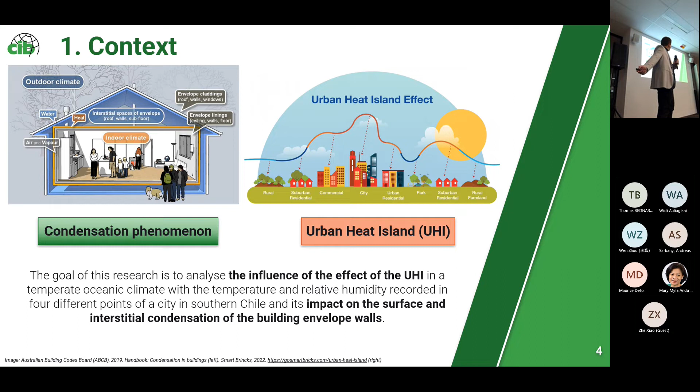About the research methodology, in Chile we have 2 different regulations about this topic: the NTM 11 about the requirement and accreditation for the environmental conditioning of buildings, and the Norma Chilena NCH 1973 about the hydrothermal behavior of building elements and components, interior surface temperature.

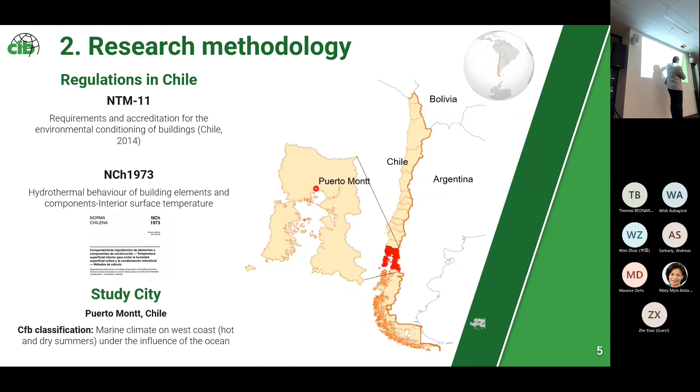You can see here in the map that Puerto Montt is very near the sea.

This is the city of Puerto Montt. We installed 4 different sensor data loggers in 4 different points of the city, and another sensor in a rural area, very near the airport. The sensors are Netatmo. They record data every half hour of temperature and relative humidity inside and outside the houses.

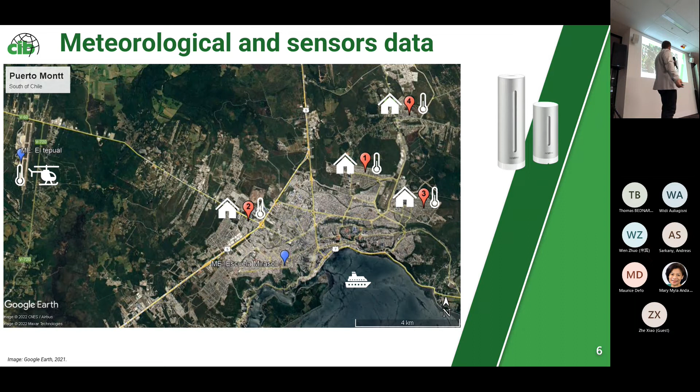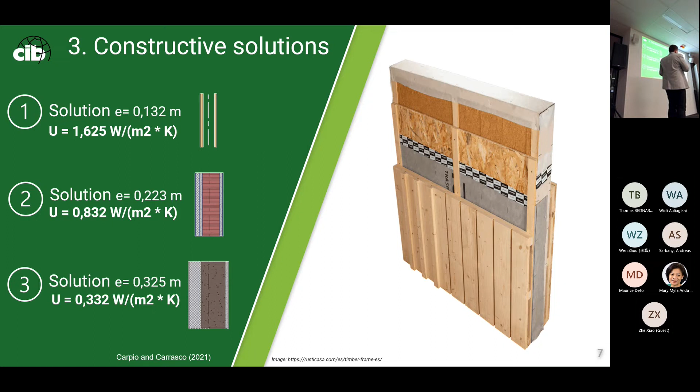Constructive solution: we simulate and calculate with 3 different constructive solutions. Solution 1 with a U-value of 1.6, solution 2 with a U-value of 0.8, and solution 3 with a U-value of 0.3. Here you can see in the picture the different solutions, and in the full paper you can see all the characteristics of the material. These are the 3 most typical solutions for the city.

About results, we have 4 different steps: temperature and relative humidity data, temperature profiles, water vapor pressure profile in the envelope, and condensation time.

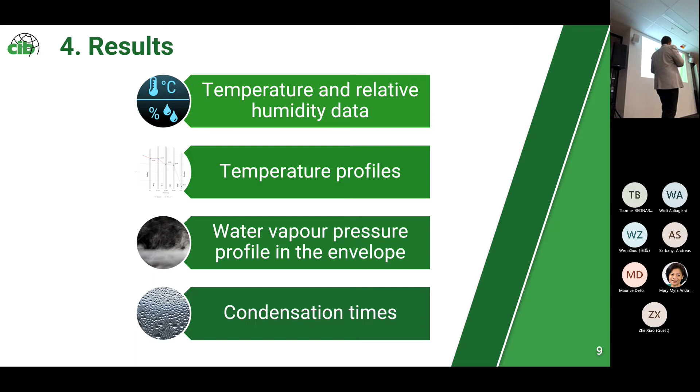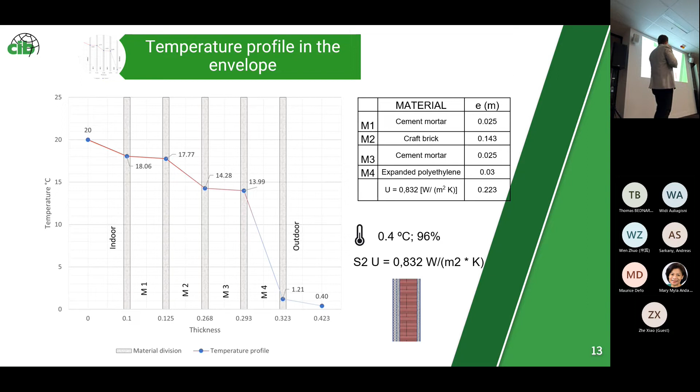Temperature profile in the envelope: we did the temperature profile for the 3 solutions for the 4 points every half hour in 1 month. We have a lot of information, but this is only one example for solution 2 with a U-value of 0.8. We can see that for the simulation, the internal temperature is always 20 Celsius degrees. We can see the profile of temperature through the different materials — for the construction we have cement, brick, cement, and insulation. This graph is for the day with lower temperature, only 0.4 Celsius degrees, and 96% relative humidity.

About the water vapor pressure profile in the envelope, this is an example of the same case, and we compare the saturation pressure with the partial pressure of vapor. In this case, we can see that we have condensation in the envelope.

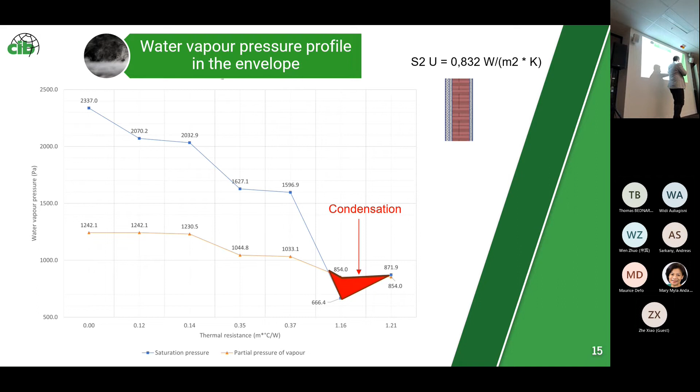We studied the 3 solutions in 4 points over 1 month, and for August, which has 744 hours, the worst case is with solution 1, where 40% of the time the construction has condensation, and the best case is solution 3, with only 0.8%. I think that this is good, but the best case is 0% condensation. Now we are working with the ministry to produce recommendations for the envelope so that in the coolest month there is 0% condensation.

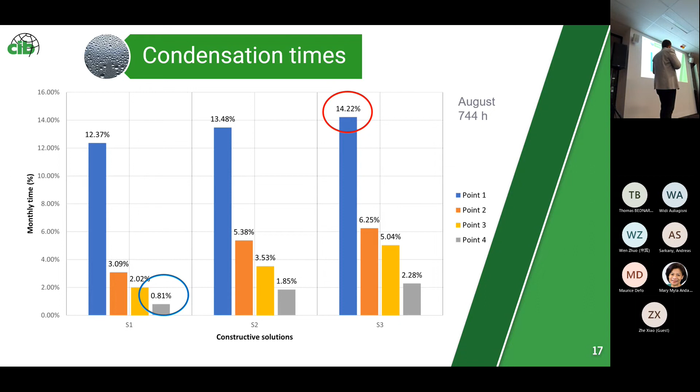Conclusions: the urban heat island effect causes an alteration of the microclimate in different parts of the city during certain days of the coolest month. On some occasions, it increases the temperature and relative humidity above the maximum recorded by the meteorological station, which increases the potential for condensation. This risk is present in the same way for the study city. For future research, it is proposed to design constructive solutions adapted to the urban microclimate that comply with local and international standards to deal with the influence of the urban heat island effect, in order to reduce the risk of condensation in the building envelope.

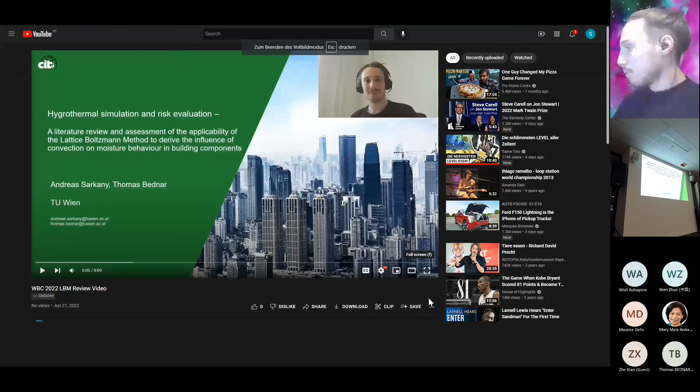So this means he's muted himself. This is the video, yes.

Hello, my name is Sarkany and I work at TU Wien... [introducing the] literature review and assessment of the applicability of the Lattice Boltzmann method to derive the influence of convection on moisture behavior.

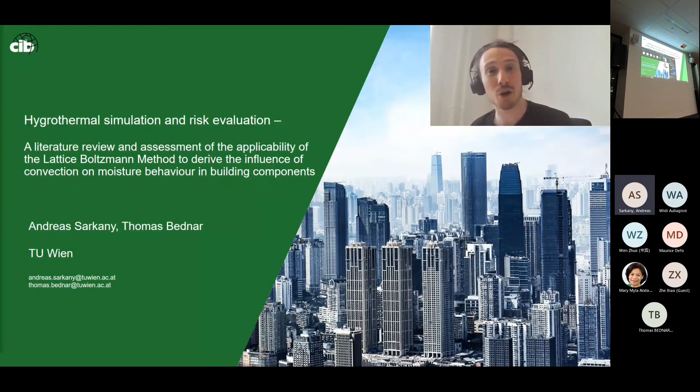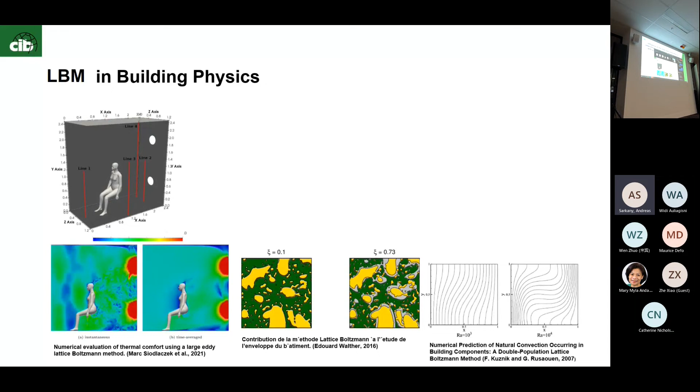In the last two decades, the Lattice Boltzmann method has proved to be a helpful tool for studying the behavior of flows in the mesoscopic domain in a variety of fields, covering a wide range from medicine, geology, to material technologies. Although the method gained popularity in the aforementioned fields, applications in building physics have been limited. It was used to evaluate thermal comfort, and some general testing and exploration to determine possible fields of application has been done. For example, it could be used to deduce describing parameters like viscosity of a porous medium, or to calculate natural convection in building components.

So first of all, one has to ask, why hasn't there been more involvement in exploring this method? One driving factor seems to be the simulation domain or scale the Lattice Boltzmann method usually operates on. Most problems in building physics take place on a macro scale level. Our usual tools to answer questions on this domain are hygrothermal simulations when evaluating building components, and CFD or network simulators when assessing thermal comfort and other questions at the whole building level. While some fields of physics and chemistry concern themselves with operations on the microscale level, like molecular dynamics, the Lattice Boltzmann method usually describes problems in between these, on the mesoscale domain.

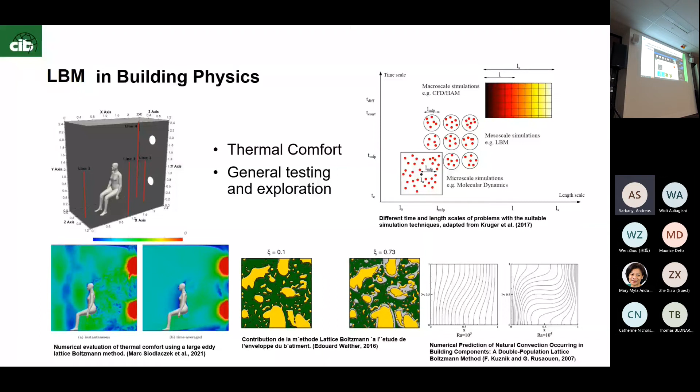The discrepancy of problem scale leads to the unavoidable task of finding problems in building physics to apply this method to. While for thermal comfort the Lattice Boltzmann method can be used to replace CFD simulations, and due to its highly parallelizable nature, speed up those simulations in certain situations—especially for hygrothermal simulations and moisture safety—the applicability of the LBM is not of trivial nature. Therefore, in this review and assessment of applicability, we wanted to shed light on whether there is potential for the LBM to better characterize certain phenomena.

Due to the favored simulation scale of the Lattice Boltzmann method, problems occurring in gaps and joints, like convective moisture transport due to natural convection, seemed like a good fit for a problem domain to apply this method to. An example could be the air gaps between EPS board joints and EPS and purlin, depicted in this model of a ventilated attic by Lewis et al. Here, potential airflow, either naturally occurring or forced, could lead to unwanted moisture transport between these layers.

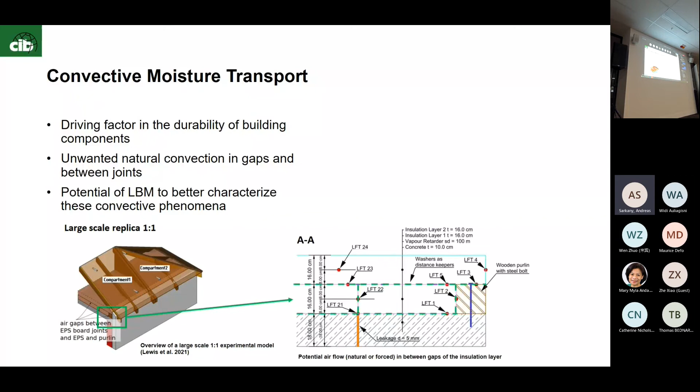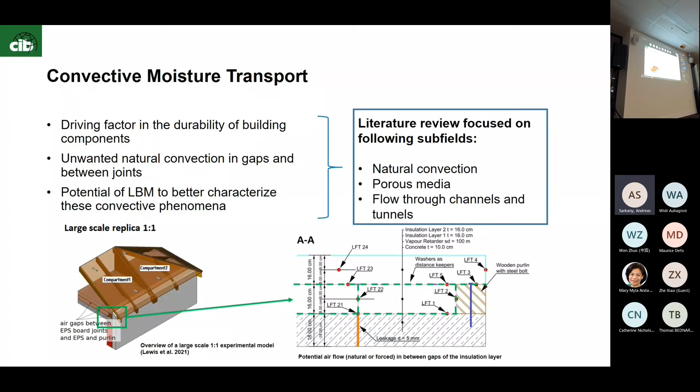After determining the problem domain we were posing our question on, we narrowed the literature review to subfields with subtopics relevant to our question of how to couple analysis between a mesoscopic and macroscopic scale. The subtopics include natural convection, porous media, and flow through channels and tunnels. When looking at natural convection, the topics of square cavities, porous media, and coupling of analysis were chosen as potent subtopics regarding the research question.

The square cavity can be regarded as a general recurring fitness check for the LBM. The usual model configuration presented is a 2- or sometimes 3-dimensional square cavity, which is differentially heated to induce natural convection of the medium inside. More complex domains involve adding obstacles inside the cavity, which can be heated or not.

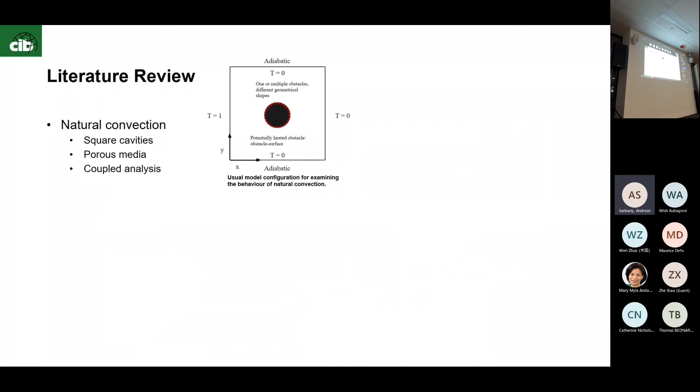Studying porous media, either the flow through or around the media and the influence of the porous matrix on its behavior is analyzed. Coupled simulations using the finite volume or finite difference methods with the LBM to simulate natural convection could also be found. These hybrid Lattice Boltzmann methods showed speedups in computational performance and lowering of mesh resolutions, depending on the coupling techniques.

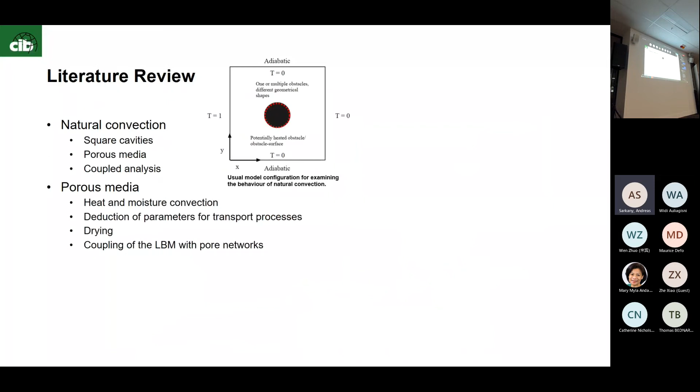Porous media was chosen as a review topic since most of the materials we are dealing with when analyzing the moisture safety of building components are of porous nature. Especially the deduction of parameters for transport processes show promising coupling possibilities.

Sousa and Nabovati showed in 2008 that they could deduce the permeability of a porous media model via an LBM simulation. For this, they randomly generated the pore structure, ran an LBM simulation, and based on the results for the speed of the fluid traversing through the medium, were able to recalculate the permeability needed for the Darcy equation to recreate this behavior.

If you remember the previously mentioned example of gaps between EPS boards and joints, one cannot ignore the wide range of work done when analyzing the flow through channels. The vast variety of these works are well suited for validation of self-created models and optimal calibration of the Lattice Boltzmann method for different boundary conditions.

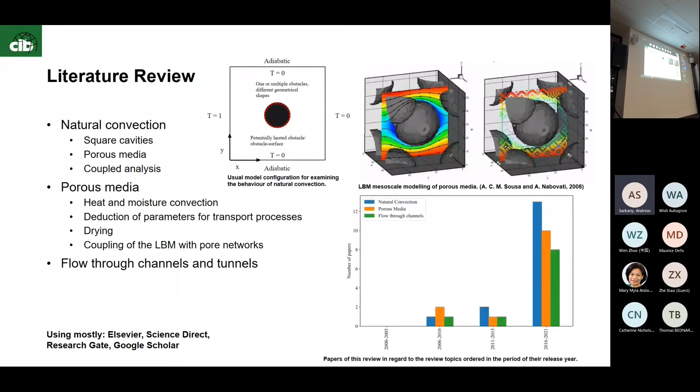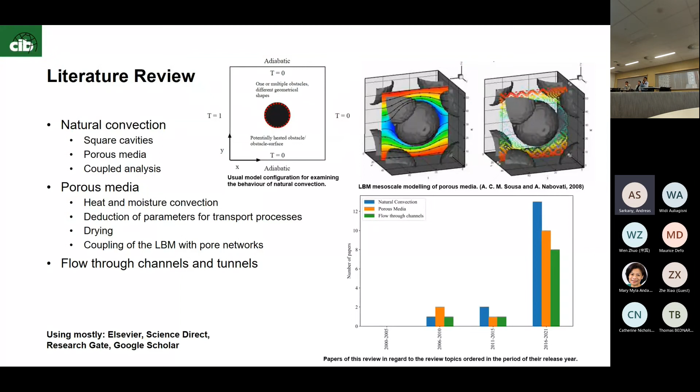In the paper, there is also an outline of the different LBM schemes used for the different topics, where this information was available. We also looked at the distribution of papers in regard to our research topics over the last two decades. We can see the general increase of work done in the reviewed areas in recent years, but this does not necessarily correlate with the research question itself; it may also be due to the rising popularity of the Lattice Boltzmann method in the research community.

Although we narrowed down our research question to the coupling of the Lattice Boltzmann method with hygrothermal simulations, especially for unwanted moisture transport by convection, a general goal of this review is to provide a good starting and reference point that can be used by researchers interested in applying the Lattice Boltzmann method in the realm of building physics.

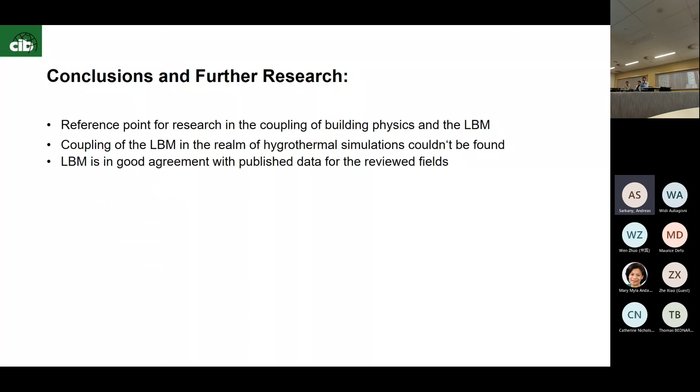Concluding, we can say that we couldn't find any works where the LBM was used in connection to hygrothermal simulations. In general, the reviewed works show that the LBM is in good agreement with published data from the reviewed fields, solidifying our hypothesis of the fitness of the Lattice Boltzmann method to be used as a tool in our further research. So what is next for us based on the conclusions we could draw from our review and assessment?

For now, the deduction of convection-relevant parameters shows the most potent possibility, in our opinion, to couple the LBM with HAM simulations. As a next step, we will focus on determining a subset of the usable parameters of the macro scale. The goal is to show the applicability of the coupling between the Lattice Boltzmann method and hygrothermal simulations in a numerical model.

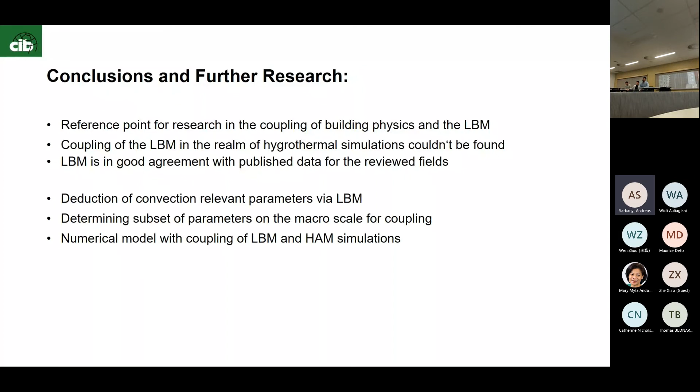This should conclude our short overview. I hope I could spark your interest in the Lattice Boltzmann method and its possibilities in the realm of hygrothermal simulations. For now, I'm looking forward to the following presentations and wish you all a nice conference day here at WBC 2022.

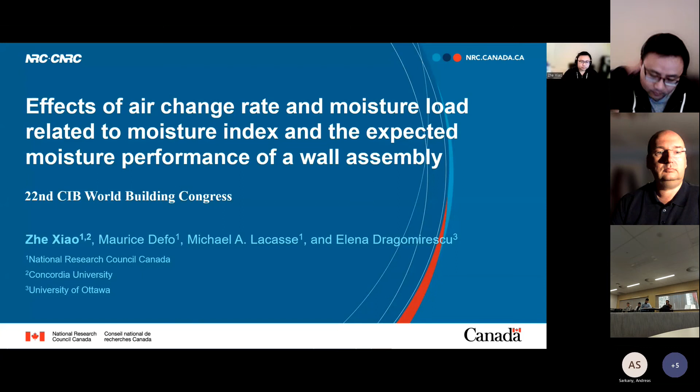Can you hear it? Yes. I'm also a visiting worker working for the National Research Council of Canada. The study I'm going to present today is about the effects of air change rate and moisture load related to moisture index and the expected moisture performance of a wall assembly. The moisture index was developed by the National Research Council of Canada, and it was used to describe the extent of moisture load imposed on wall assemblies located in different regions across Canada.

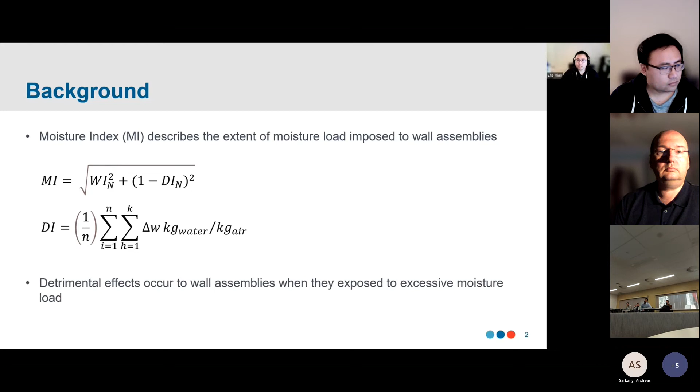This index, incorporated together with the number of heating degree days for a particular location, was used as an indicator to determine the minimum level of moisture protection for exterior walls. When the moisture index is greater than 1, the cladding assembly requires a second plane of protection incorporating a capillary break and sheathing membrane, building elements that can be presented in various forms given the different types of wood frame wall assemblies constructed in practice. Detrimental effects could occur to wood components of walls when exposed to excessive moisture load for a prolonged period of time, with typical effects including mold growth and wood decay. For locations with a higher moisture index, the wall has a greater chance of exposure to excessive moisture load.

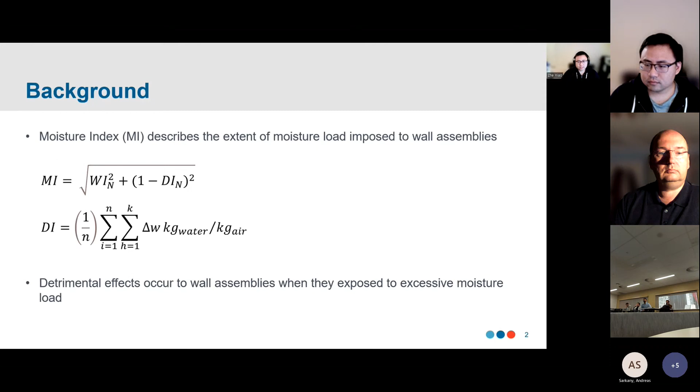The objective of this study is to figure out to what extent the moisture index can reflect the performance of walls under different conditions, particularly the ACH and the moisture load.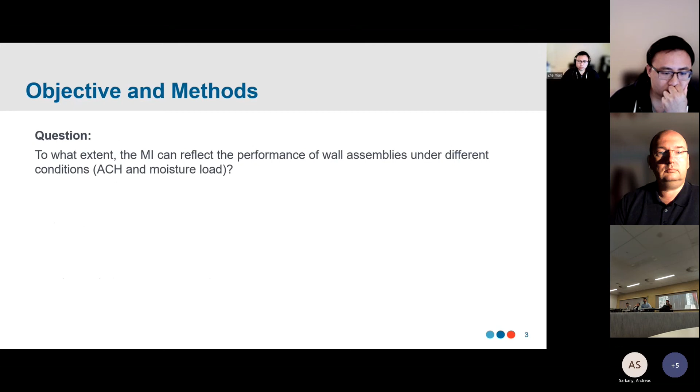Specifically, the procedure includes performing hydrothermal simulations for vinyl-clad walls located in different Canadian cities with different moisture indices, subjected to different levels of ACH and moisture load. In the second step, we'll derive the mold growth index for wall assemblies subjected to the climate of these cities, and then investigate the correlation between the mold growth index and corresponding moisture index.

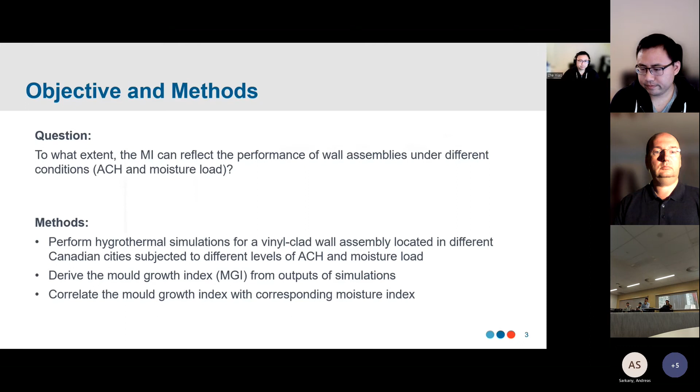The simulated wall consists of a layer of vinyl cladding and asphalt-impregnated paper-based membrane, an 11 millimeter thick OSB sheathing panel, 140 millimeter insulation, a vapor barrier, and gypsum board. The depth of the air cavity was set as 2 millimeters to represent the space beneath the vinyl, which varied from 0 to 5 millimeters for an actual constructed vinyl wall.

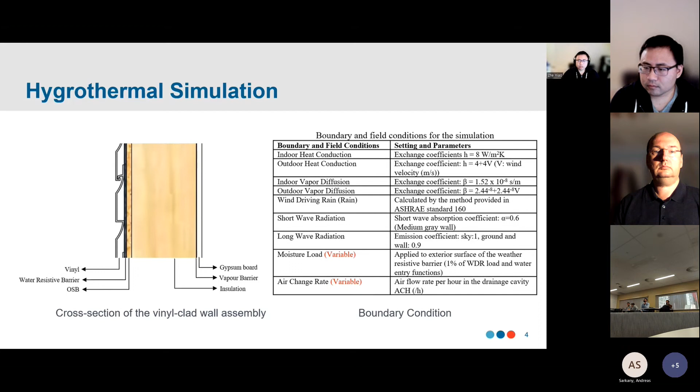Properties of materials of the wall assembly were obtained from the NRC material property database. Boundary and field conditions for the simulation are shown in this table on the right. The moisture load and the air change rate are the primary variables for this study.

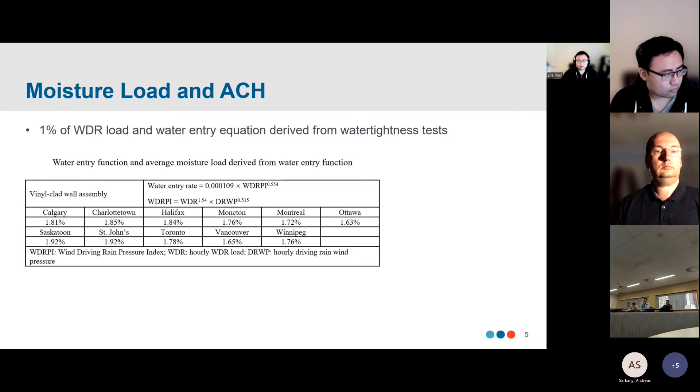In this study, we implemented 2 levels of moisture load and 2 levels of ACH, so that we could investigate their effects on the extent of correlation between the moisture index and the moisture performance of the wall. One level of moisture load was considered as 1% of the wind-driven rain load, as suggested by ASHRAE standard 160, and the other level was based on water entry functions obtained from water tightness tests.

This is the specimen that was tested, and it has the same configuration as the model used in the simulation.

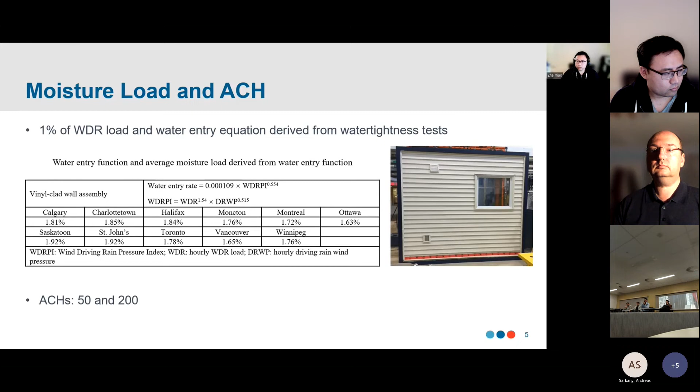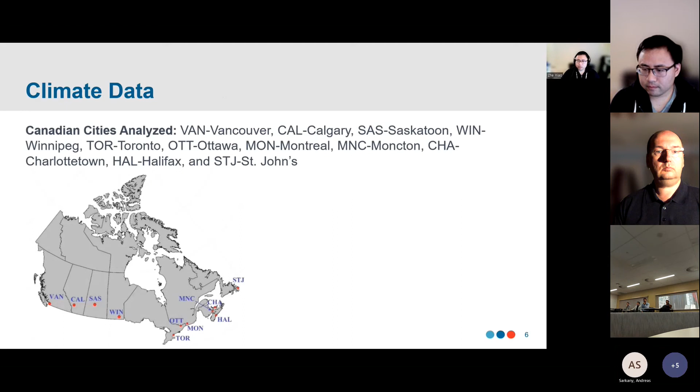We used climate data for 11 Canadian cities in the simulations, and these cities are located from the west to east coast of Canada with diverse climate characteristics. The moisture index for each city is also different.

To permit a greater number of samples and thus generate more results and a more reliable conclusion, for each city analyzed, 15 sets of 31-year climate data for the time period 1986 to 2016, generated from a climate model, were used. These sets of data were initially used to generate the future projected climate data.

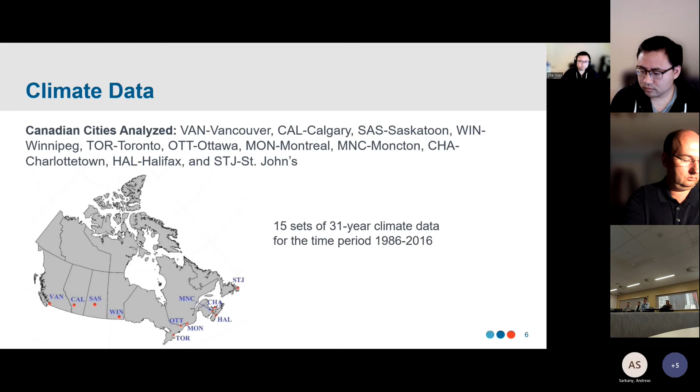The correlation coefficient was 0.75 for the vinyl-clad walls using 50 ACH and the moisture load derived from the water entry function. When the moisture load was reduced to 1% of the wind-driven rain load, the correlation coefficient was also reduced, to 0.61.

At the same time, for 200 ACH, the correlation coefficients were only 0.38 and 0.4, and changes in the moisture load had no significant impact on the coefficient, as the mold growth index did not vary with the increase in moisture index when values of moisture indices were less than 1.2. This means that with the given ACH, the moisture performance of the wall sample was not sensitive to moisture load, as represented by the moisture index.

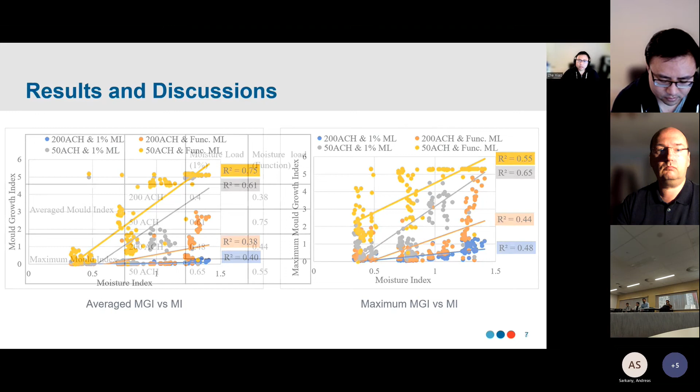From those graphs, this is an overall summary for those plots. It is evident that the effect of ACH through correlation is greater than the moisture load for the simulation setups as implemented.

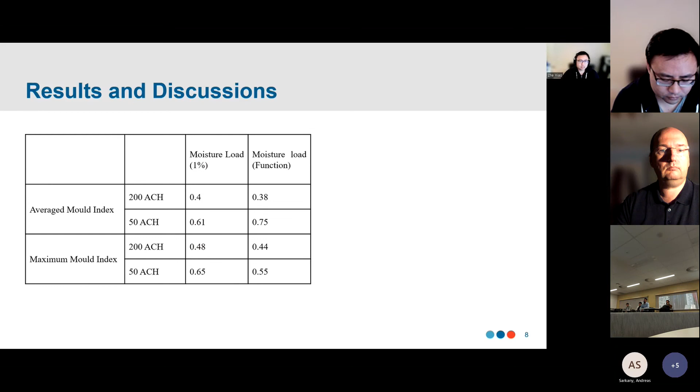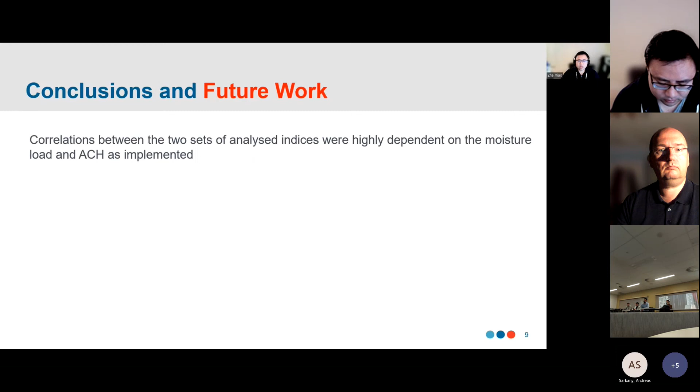From this study, we can conclude that the correlation between the two sets of analyzed indices was highly dependent on the moisture load and the ACH levels as implemented. When the moisture load and ACH were favorable to the humid environment, correlations between the mold growth index and moisture index were higher than those favorable to a dry environment.

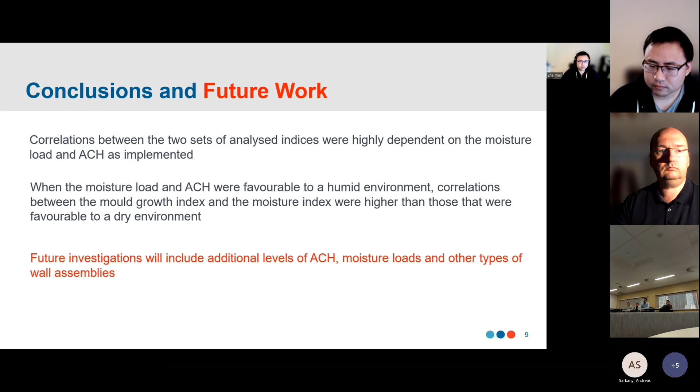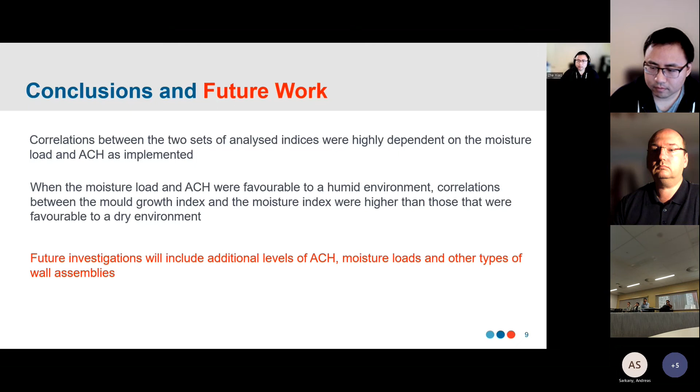Future investigations will include additional levels of ACH and moisture load, and we will also investigate this type of correlation for other types of walls or walls with different configurations. So that will be all.

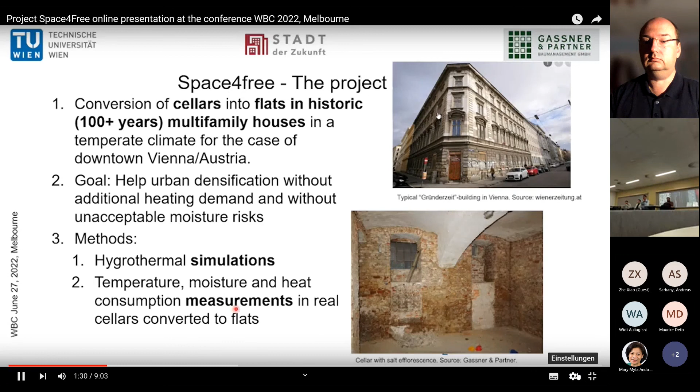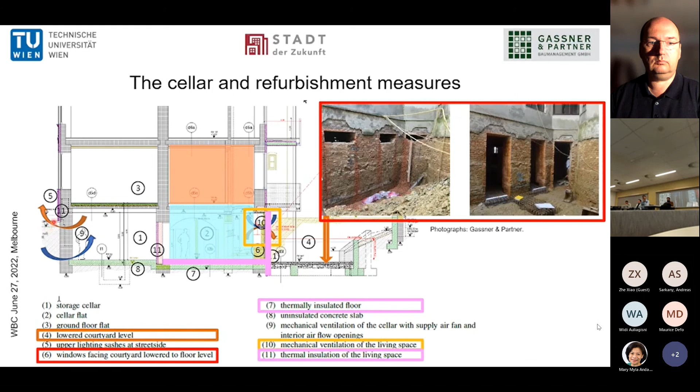But on the outer side, the street side, no insulation could be applied for economic reasons, so it was not dug down there. So the special aspect is that no thermal insulation could be applied to the wall adjacent to, or facing, the street.

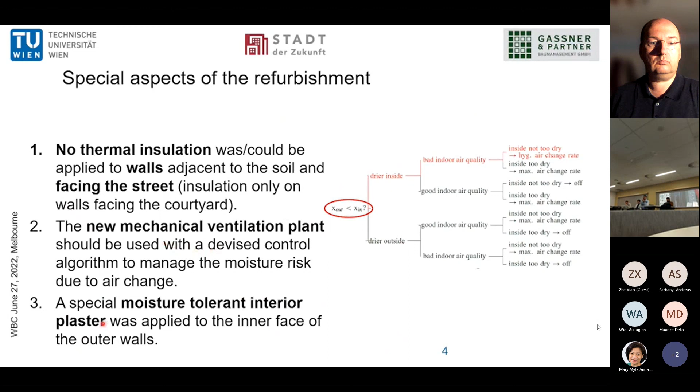There was this new mechanical ventilation plant with a special moisture-driven algorithm that compared the moisture outside with the moisture inside. Whenever the absolute moisture content outside was smaller than inside, when it was drier outside in absolute terms, ventilation was well possible. When it's more moist outside, this was the problematic path. We decided to nevertheless run a hygienic air change rate, with hygiene reasons prevailing over moisture and mold formation reasons. A special moisture tolerant interior plaster was also involved in the project.

The first research question regarded the energy, the winter case. Can we use the heat losses of the unrefurbished building, of the flat above the cellar, to heat the flat in its refurbished state? Can we use these heat losses to entirely heat the new flat without having to supply additional heat? And can we thus have space for free, energetic space for free, which also gave the project its name.

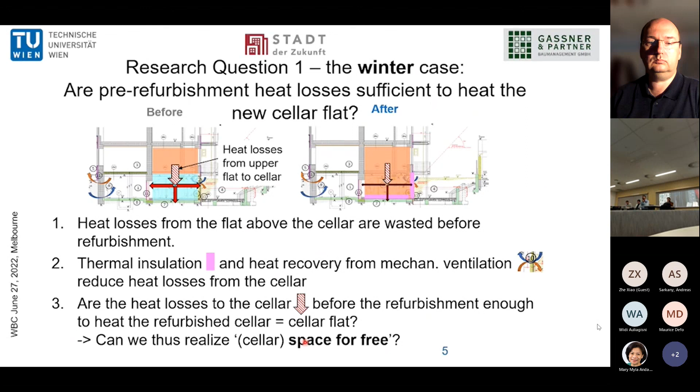The second research question was, how about the moisture? Do we run a risk here? For two reasons this is a good question, because we are obviously in the cellar in contact with the surrounding soil that is cold and moist. So the walls and the floor become cold and they may suck water from the soil via capillary action. We made a sensitivity study in a pre-study on how far this rise of damp in the wall depends on the water content of the soil.

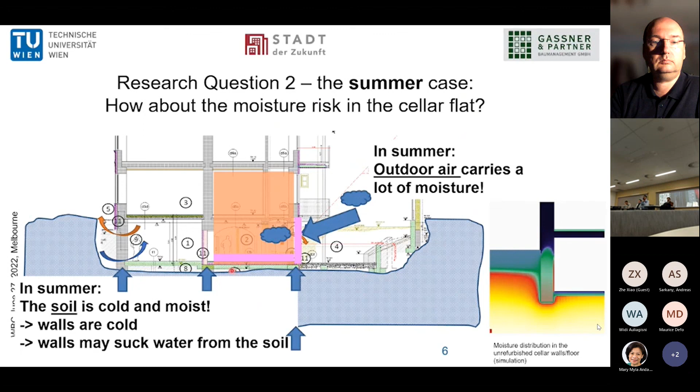And the second risk attached to this is the warm and moist air that in summer enters the flat and gets into contact with the wall and floor surfaces, and may condense there, or may lead to mold formation. Here are the results of these two questions.

First, the energetic question: can we have space for free? According to our simulations, yes we can. We see in this chart the heating energy per square meter per year, the bandwidth of the heat losses in the unrefurbished state, before refurbishment, of the flat above the cellar to the cellar. Below we see the heating demand of the new flat in the cellar, in the refurbished state, and we see that this is way below the losses before refurbishment. That means these losses are sufficient to cover this demand, so it is possible to heat the cellar just with the losses from the top flat.

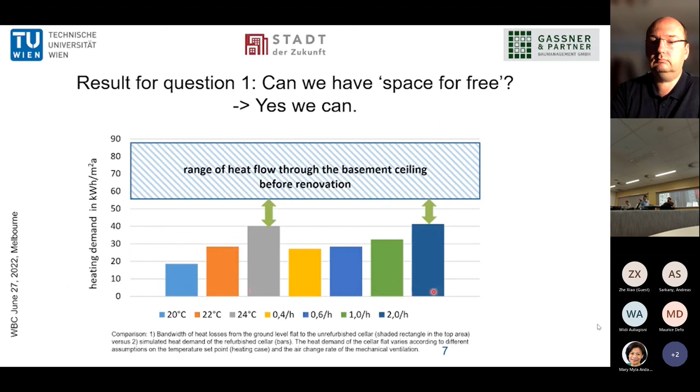And this result is stable across different heating set points and different air change rates, even up to a quite unrealistic high air change rate.

The second question regarded moisture. Do we run into a moisture risk using a cellar as a living space? So far, according to our results, it does not seem so for this specific case and these specific assumptions, using a mold formation model called the Viitanen or VTT model, based on the so-called mold index that ranges between 0 and 6. In our study the values were so small that our scale range extends only up to 1. We look here at an outer wall and see the values are very, very small. Only from a value of 1 onwards does mold start to grow and the spores start to germinate.

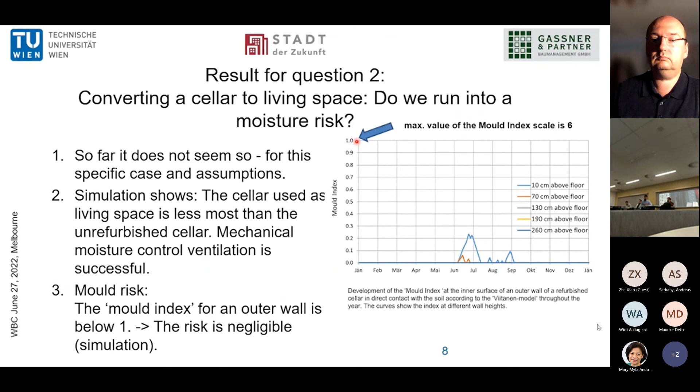The second aspect were the contributions to moisture inside from different parts. There were three important parts: the so-called interior moisture loads, basically from the users, sweating, breathing, cooking; then the ventilation; and then the building components that are in contact with the soil. The interesting aspect is that the contributions from the building components are much smaller than the contributions from the user. Moreover, the results are independent of the air change rate, which is quite surprising with regard to the contributions from the building components.

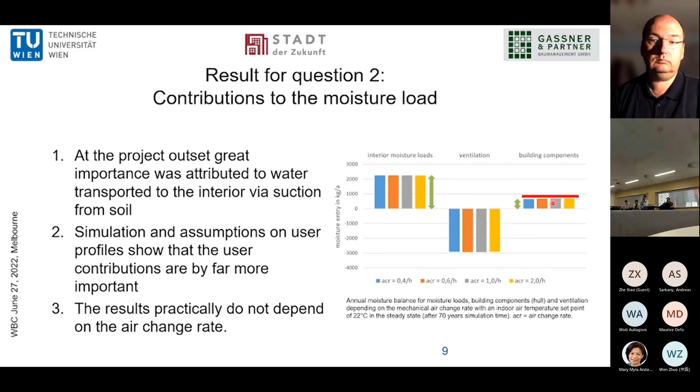There are limitations of the study, all regarding the simulation, the data on material properties, in particular the moisture content of the soil and the moisture behavior of the brick. Furthermore, the geometry was simplified. Even if the software could handle three-dimensional geometry, there was a certain assumption on user behavior. The mold model so far was validated only in the laboratory, and the exterior climate especially might change in the future towards warmer and more moist summers, which would increase and therefore change the result with regard to the moisture risk.